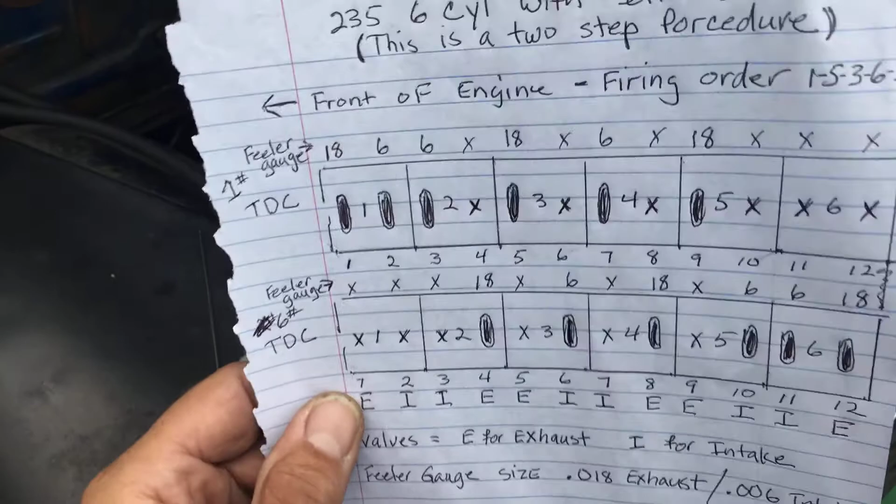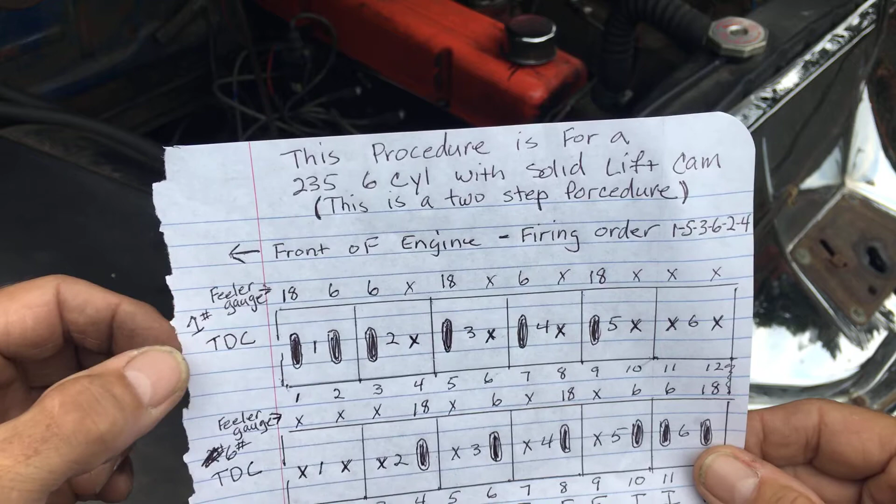I've got this little sheet that I made up here, I'll show you guys what I got. It's two stages that I'm going to use to do this. First, I'm going to bring number one up to top dead center, and that will allow me to do the exhaust valve down here. This whole bank is exhaust, then intake, then exhaust, and so forth.

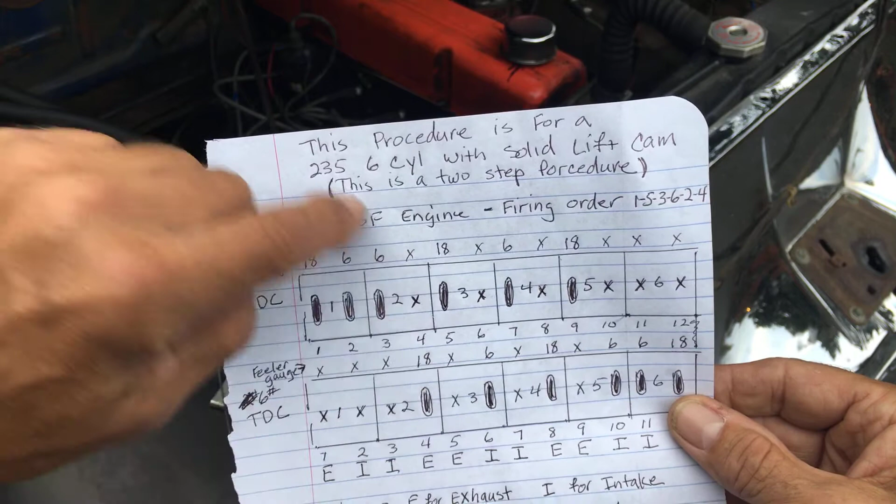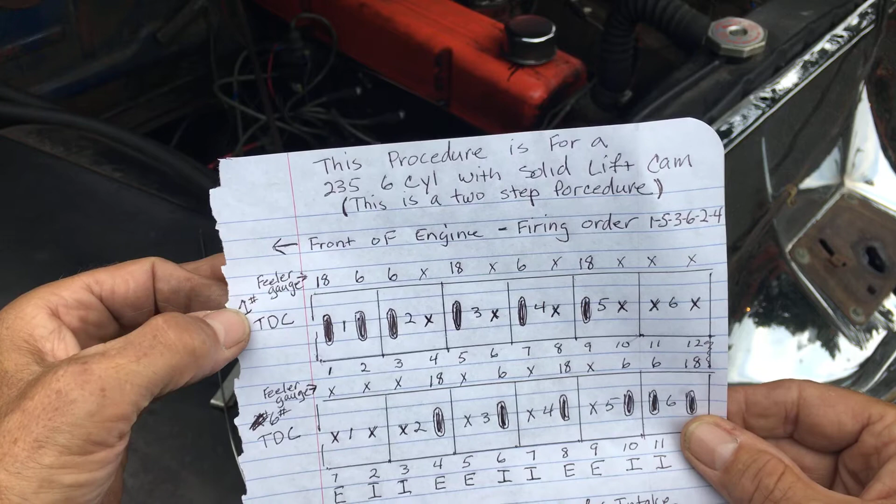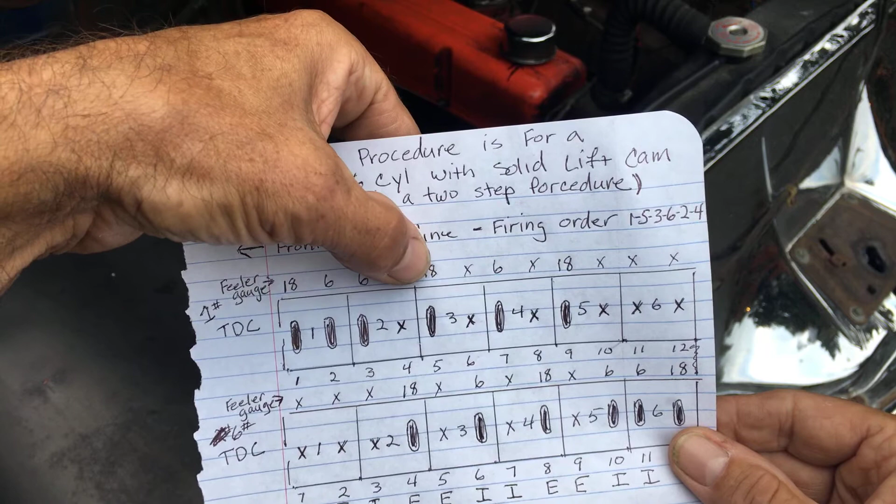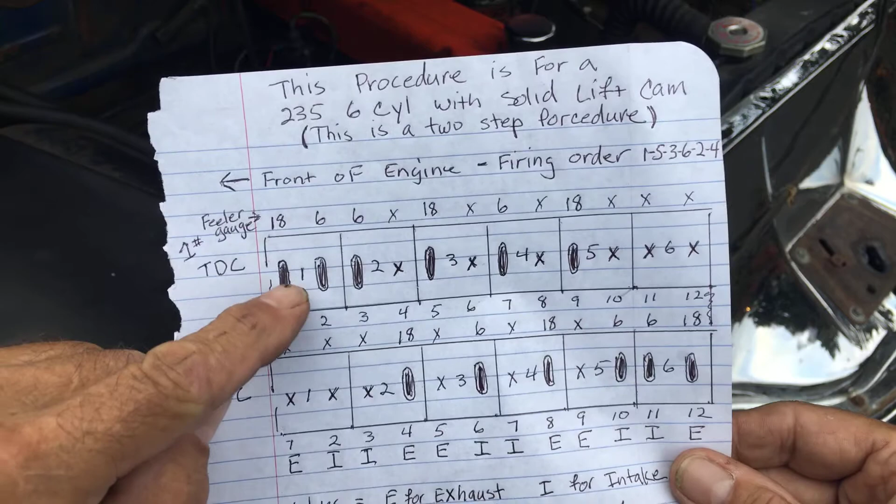I'm just going to pay attention to this. Here's the cylinders, 1, 2, 3, 4. So when I bring top dead center up, I'll be able to do both the exhaust and intake on this cylinder, using an 18 feeler gauge on the exhaust and a 6 on the intake. When I'm on top dead center for number one, I'll also be able to do number 2 intake, number 3 exhaust, number 4 intake, number 5 exhaust. That's 1, 2, 3, 4, 5, 6 rocker arms, or 6 valves out of 12.

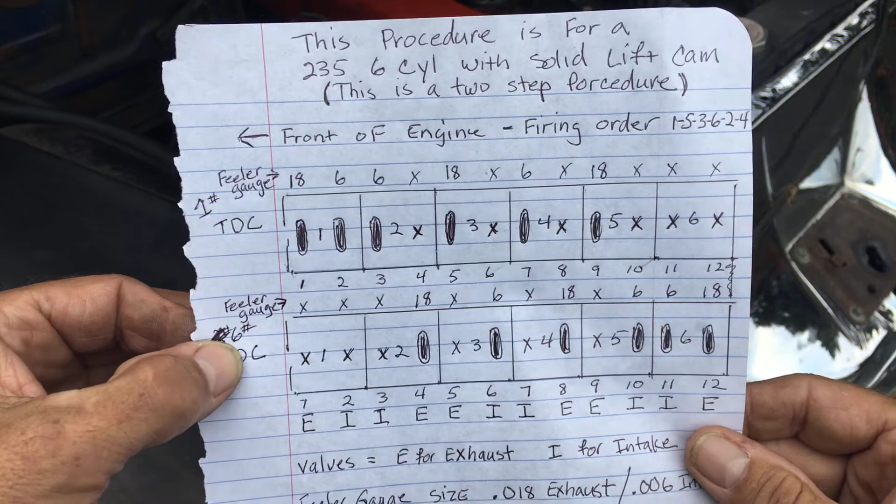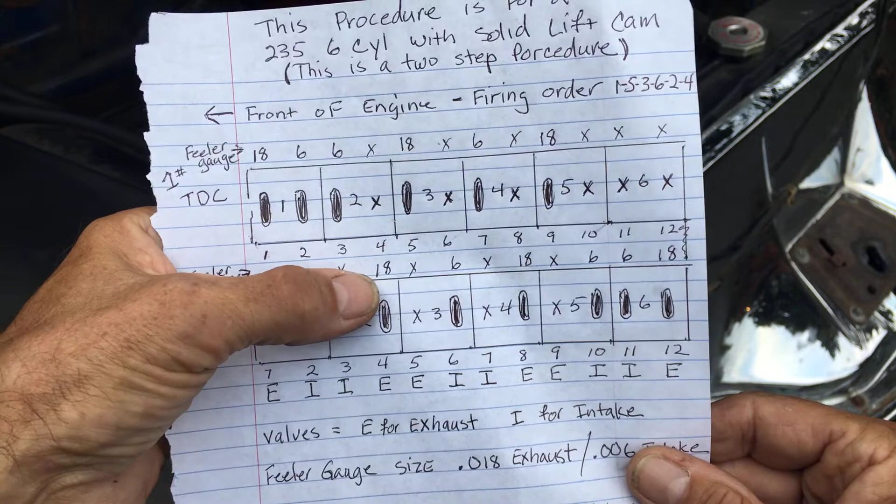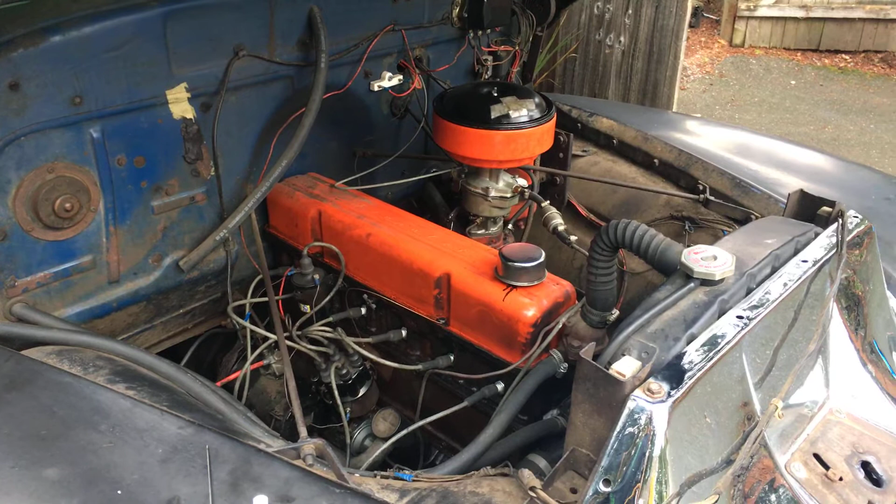When I roll it over and do number 6 at top dead center, I'll pick up the ones I missed when I did number 1 at top dead center, and those also are 18 on the exhaust, and so forth. So I'm going to pull the valve cover off and roll the engine over to top dead center on number 1 cylinder.

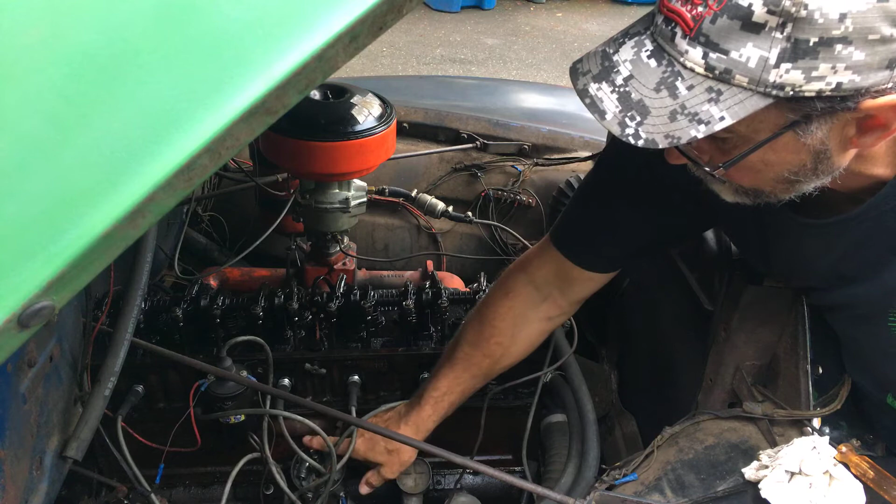Okay guys, I'm going to bring number 1 up now to top dead center. I've got my rotor facing over here, number 1 is right about over here, so I'm just going to roll the fan over and wait for number 1. I've got the plug out, and I'm seeing rocker arms moving on number 1 right now. It should be coming over to the compression stroke, so I'll be able to feel that with my finger. You hear that?

So I'm just going to bring that over and then bring my timing mark on the flywheel right to there. Now if I rock these, see, number 6 is rocking, so we've got number 1 at top dead center now.

So I'm going to grab my feeler gauges here and just test it out, see where I sit on this thing. Remember, a noisy valve train is a happy valve train. So I've got number 1 exhaust right out here, and she's a little bit tight, yeah. My intake feels good, but that exhaust is tight, and I don't like that.

So I'm going to get this ready to loosen up, and then we're going to make an adjustment here. Okay, so I loosened the exhaust, loosened this rocker arm on the exhaust for number 1, and yeah, it was a little snug, so I'm glad I'm doing this adjustment right now.

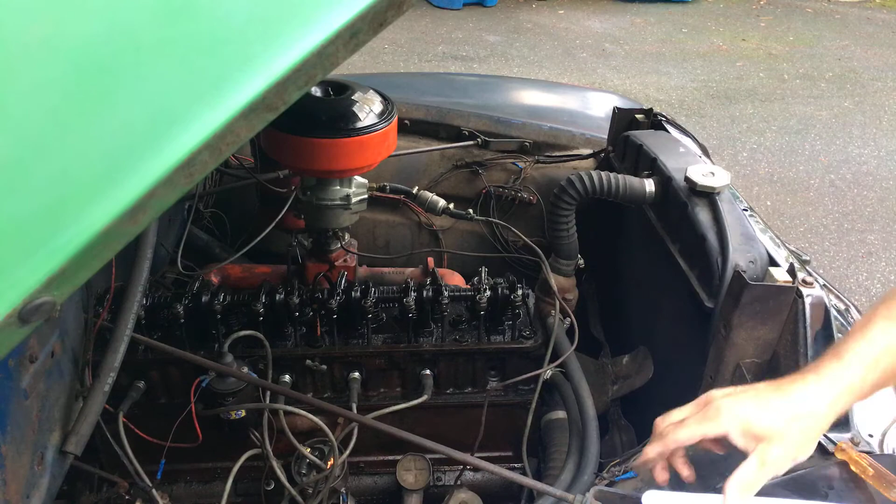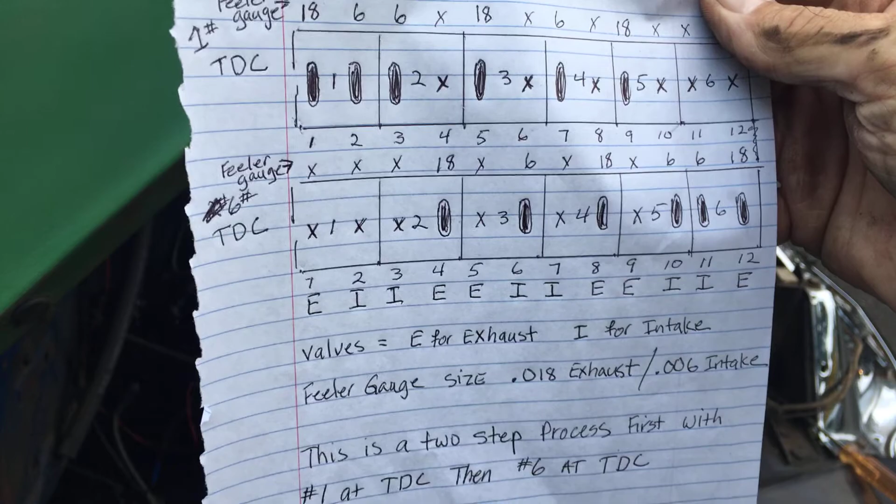Now the next set, I'll go down and do this bottom one. I could actually do intake and exhaust on number 6, and then intake on 5. So I'll get those started now.

So intake on 6 is a little snug. And then exhaust on 6, I'm going to have to get up and in here a little bit, it looks like. Yep, exhaust is tight on there. And exhaust is really tight on number 5. So okay, I'm going to shut this off and get those done, and I'll bring you guys back.

Okay guys, so I got all the valves adjusted here, and I double-checked. I accidentally loosened number 5 up when I was on the second sequence on the exhaust, so I had to run it back over to number 1 and get number 5 exhaust again. I had it out of whack there, so I got that all back now.

So I'm taking some lacquer thinner and hitting the top of the head where the gasket seats. What I'd like to do is actually seal the gasket to the head rather than to the valve cover, because these 6 cylinders sit at a bit of an angle back, and they like you to have the gasket glued down. It dams the oil up from going past the gasket. So I'm going to put a little Permatex on the gasket and let it sit for a bit.